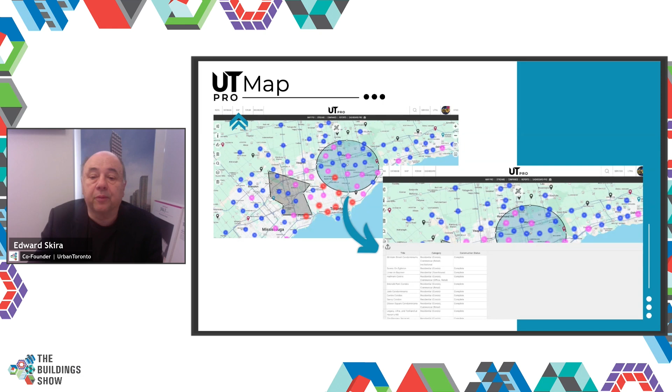So there is a wealth of information, and UT Pro offers sophisticated tools that will allow you to download information via spreadsheet and do other types of analysis to help you get the information you like. This is what UT Pro looks like when you log in. It looks like the regular site, except there's a UT Pro logo, and there's a bunch of different sections. The map has a spreadsheet, so you can pull specific areas. You can draw a polygon or circle on the map and export it easily into Excel or Google Sheets.

Streams is an important element of what we do. We have three lists: new projects - every new project, as we add them, our clients see them in real time; project updates - every update we make to a specific project, whether the height changed or a new principal was added, you'll be able to track that in UT Pro; and finally applications, a stream from the City of Toronto tracking every single application, whether it's planning, COA, SPA, OPA, rezoning, and so forth.

And you can filter by planning, COA, or TLAB. There is a ton of information here.

We have over 5,000 companies in our database. You get full access to them in UT Pro. You can select and filter by category, or put in a specific company name and just look at their projects. It's a really important way to follow what's happening.

Reports is a very integral part of UT Pro. It allows you to look at 5,000 companies, 5,700 projects, 144 data points, and slice and dice the data however you like into spreadsheet form.

We have dashboards. This one is available on the public side, on both sides. Pro actually has additional dashboards just for members. This is an overview of development across the entire region by number of projects, number of units, cranes, and so forth. So that is what UT Pro offers.

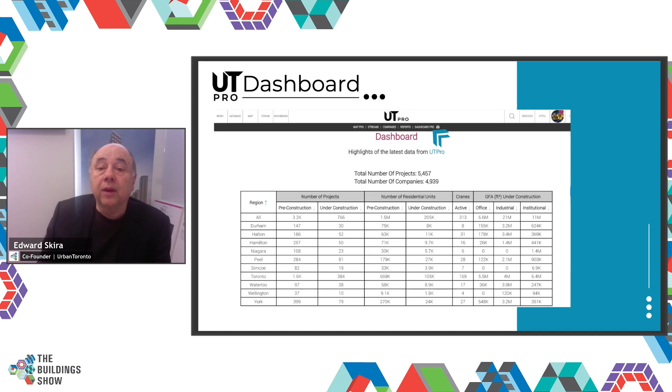We have a major bank that uses it to figure out where to put their branch network, and a major grocery store chain, same idea for their stores. So anybody looking forward in terms of growth - government, retail, school boards, transportation - UT Pro is your product. That is Urban Toronto and UT Pro in a nutshell.

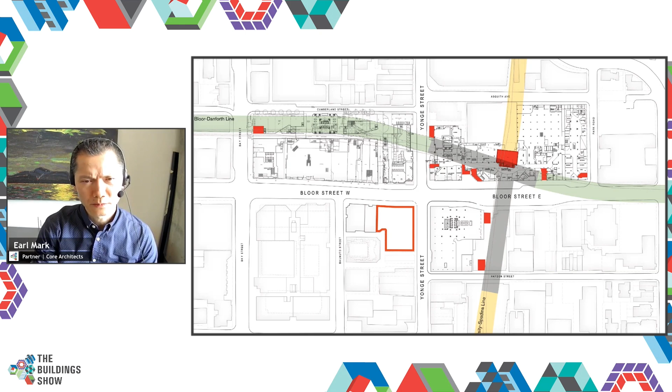This is our site as it existed in 2014, the year that ownership of the site changed hands from the Stollery's family to our client, who asked CORE to undertake a number of feasibility studies to see what could actually be achieved on the site itself.

It immediately became apparent to the client what the significance of the site could be for the city, but also for the city skyline. At this point, the client commissioned a small competition inviting Robert A.M. Stern, Renzo Piano, and Foster and Partners to deliver their vision for the site. This competition was won by Foster and Partners, with Core Architects retained as architect of record.

And this is where our story really starts, and the story starts in London. So here we are in Foster and Partners offices in London. I don't think F&P really needs any introduction to the audience here today. They're a world-renowned architecture firm and really a juggernaut when it comes down to work.

When they started the design for this project, they produced countless numbers of drawings, sketches, diagrams, and models to study what this site could be.

The evolution of design took the course of the next 2 years, informed by a series of workshops, 5 in total, run by Oren Tamir and James Parakh at the city, without whom and their support this project wouldn't have been realized. But also at this time, and just as importantly, RJC, our structural engineer, and RWDI, our wind consultants, were retained to help inform the building.

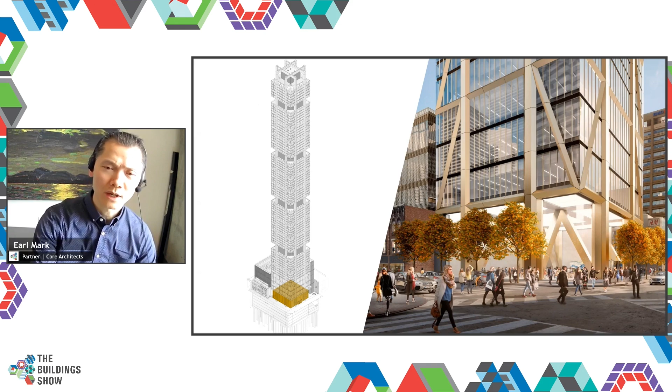It's probably no secret at this point that the building was purpose-built around a singular ground floor retail tenant. This particular electronics giant had a couple of simple asks. They wanted the project to have a retail space that was roughly the same size as the tower shape above, over 40 feet or 13 meters high, and they didn't want any columns falling into their retail space at all.

And so this is effectively where the first challenge of the project set in, where you would expect to see the tower core consisting of its elevators and its stairs coming crashing down through the ground floor and anchoring down to the foundations below.

Here we were required to stop that tower core at level 5, where it couldn't act as a stabilizing mass, and the project team was forced to figure out how to deal with the combined weight of approximately 4,000 Sherman tanks worth of concrete, glass, and steel, and have this hovering over the commercial floors below.

From a vertical transportation perspective, the solution was pretty straightforward. Coming in from the main lobby, a dedicated group of elevators was added on the west core of the building, 3 elevators taking residents up from ground to their sky lobby on level 6, and then patrons to the hotel and the associated commercial floors up to their connecting points at levels 5, 4, and 3, respectively.

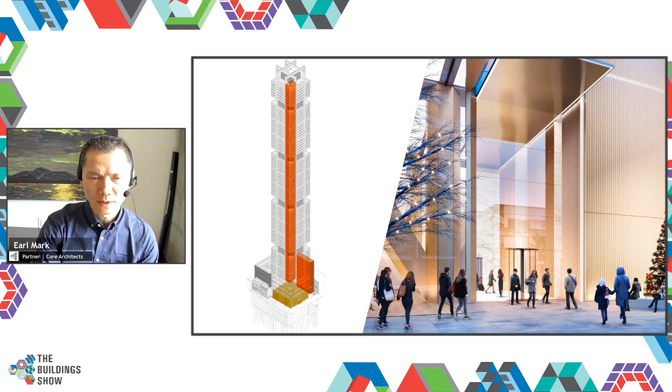From a structural perspective, the solution was also pretty simple. 8 mega columns were introduced, 2 per side of the building to support the tower perimeter. The term mega column, maybe not the most original, but probably one that's entirely accurate.

These are columns that are 2 meters wide by 1.8 meters deep, minus the chamfered corners that you can see in the image on the right. They're composite steel and concrete structures with I-beams or W sections, approximately 550 deep by 450 wide and 115 millimeter flanges. Or for those more comfortable in imperial, imagine these columns being just under 7 feet wide by 6 feet deep, with 22 by 18-inch steel structures in them, 4.5 inches thick.

So some fairly significant structural members here.

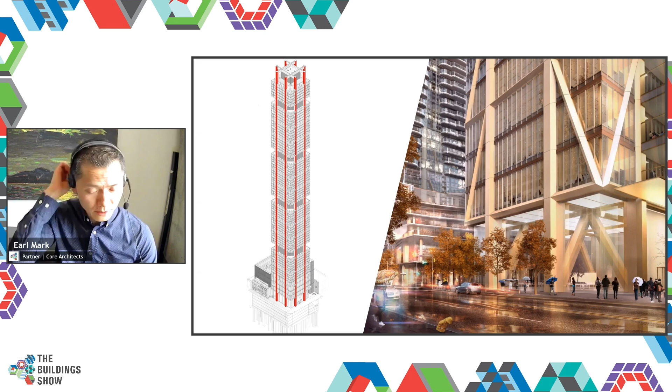Foster and Partners took the idea of a column-free retail space and translated this conceptually to the residential towers, where aside from the mega columns, the only other structure visually experienced by residents would be 4 columns, 1 in each corner of the tower, spanning 5 out of every group of 6 floors, supported by diagonal steel struts, resulting in this belt and suspenders type structure shown in the diagram to the left.

In our opinion, this results in an elegant tower that's roughly 305.8 meters tall, 85 stories in height, with 5 levels of below grade program, and over 1 million gross square feet of construction area.

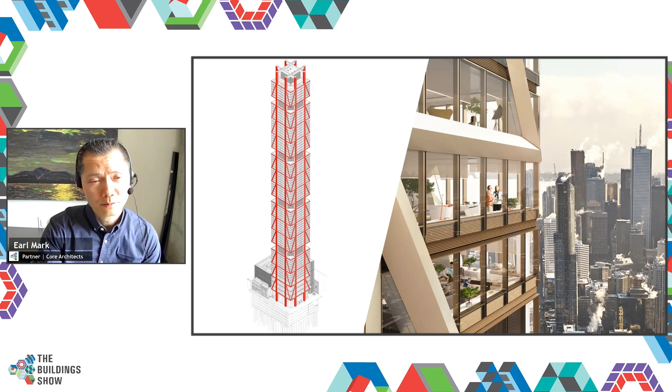If you think about what's happening here physically, it's next to impossible to pump water and other services 300 meters into the air and back down again. So these mid-level mechanical plants were required to serve the various parts of the program they're associated with.

This also helped organize our tower into its various components, with the commercial floors from ground to level 16, banks of 18 stories each of low-rise, mid-rise, high-rise units, and then finally the penthouse and the tower crown at the top. The mid-level mechanical plants also allowed for partial occupancy of the tower, meaning we could occupy the lower floors, being the commercial and low-rise units, while the rest of the building was being constructed above.

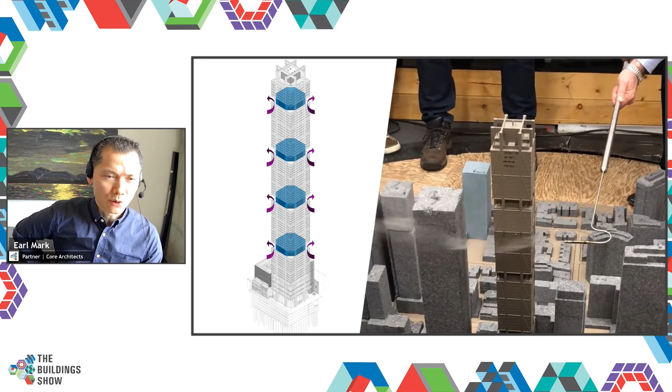Maybe more importantly, what these mid-level mechanical breaks helped do was effectively confuse the wind. With input from RWDI, the corners of the mid-level mechanical floors were severely chamfered and cut back. This allows the building to do something: while the wind speeds wrap around the building, the wind actually gets confused and starts to swirl around the corners, effectively slowing down the velocity of the wind and the forces acting on the building.

If we didn't do this to optimize the building shape, we would have ended up having a tower structure that was larger than what we had described previously.

In the video to the right, we're here in RWDI's wind tunnel in Guelph. The smoke pen, as you can see it moving up and down the tower, represents the motion of air and the velocity of air as it moves around the building. It's really subtle, but when you see that pen pass the mid-level mechanical break, you can see the smoke really dissipates, simulating the change in velocity of the air as it acts on the building.

Finally, at the top of the tower, we added a TMD, or tuned mass damper, shown in the blue box at the tower crown. The idea here is that if you think about the building as really this big sail, with wind blowing against it and higher wind speeds at the top, acting as a big cantilever arm, the wind will actually make the building move up to 455 millimeters in each direction, or almost up to a meter in total as the building moves back and forth.

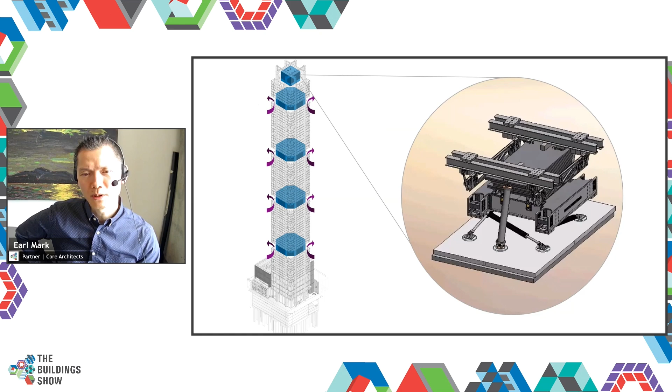In our particular case, we have 350 metric tons of steel at the top of the building that's guided by a number of pistons, which will allow this mass to move in the opposite direction that the building is moving in, slowing down the acceleration and mitigating the negative effects of the building acceleration as it would otherwise be moving.

So we talked about stack effect and the negative effects that stack effect could possibly have in the building. Stack effect could be basically thought of as the movement or displacement of large volumes of air due to the temperature differential inside and outside of the building, and having this air move through the building.

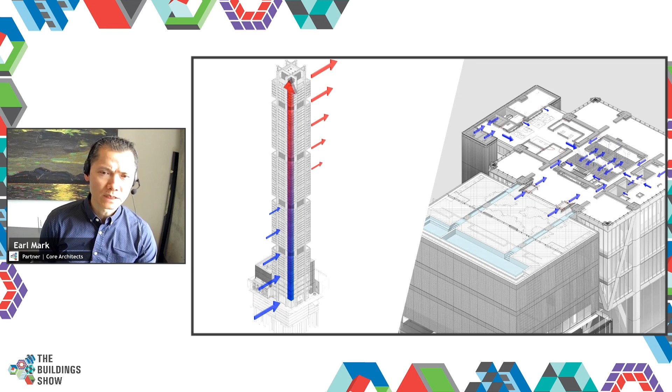I try to think of it not as this idea that warm air rises, but more of this concept that, particularly in the winter months, cold air is heavier and more dense than warm air. This air tends to push itself down in the atmosphere and wants to enter the building through its openings, whether through doors, air intake shafts, or garage openings. It pushes itself into the building and then displaces warm air, which then moves up the vertical shafts of the building, being the elevators, the stairs, and the garbage chutes.

And so this stack effect needs to be mitigated. I'm sure a lot of you understand some of these effects because you've experienced them before, where you've had doors that have been really difficult to open or that slam shut after they're closed.

But what the stack effect will also do is cause some of the building systems to fail, where elevator doors might fail to open because of pressures acting against them. Or you might have areas where you're expecting to get tempered air, heating or cooling, into certain areas of the building, and that air gets displaced, resulting in uncomfortable rooms within the building itself.

So what we're trying to do is figure out a way to limit the motion of air in the building. The diagram on the right-hand side is an axonometric taken on level 6 of our building, where you can see the arrows indicating the direction of air movement through the building, and the size of the arrows representing magnitude.

In this particular case, you can see where we're expecting air to come in through the exterior amenity terrace, through the doors, as well as from the elevators on the west core of the building to the tower, making its way to the elevator core and the stairs, and making it up the building itself.

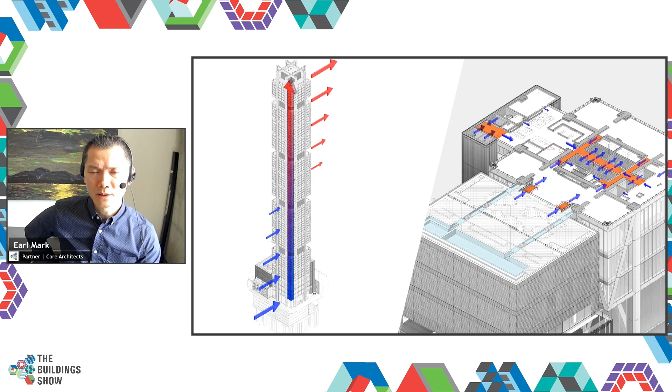To limit this displacement or motion of air, we've introduced vestibules or airlocks in the building, shown in the regions in orange, simply by providing a series of doors with high quality seal packages around the perimeter. What we're attempting to do here is limit the amount of air that could pass through the exterior into the building core, and thus limit the pressures affecting the stairs and elevators and limit the stack effect on the building.

In a similar vein with the elevator cores and stack effect being caused by temperature differential, here we are showing a diagram illustrating air cooling being provided to the elevators themselves, reducing the temperature in the elevators to match closer to the outside air temperatures, reducing the stack effect through these vertical systems.

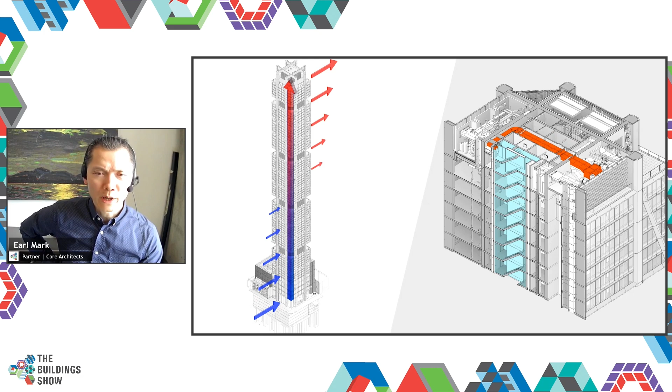And as well, where we have our exit stairs, on a similar notion, we've introduced voluntary stair pressurization in the tower, blowing air into the stairs almost like inflating a balloon, thus preventing air from moving into the stairs and causing the negative effects of stack effect taller in the building.

Okay, so in the interest of time, I'm going to have to talk faster than I already have to zip through a number of slides here.

Ice and snow are a definite cause for concern for some of the taller towers. We had to find ways to prevent snow and ice from accreting on the tower surfaces and falling to pedestrians below, creating risk areas.

Here's our front entrance canopy, where the horizontal surfaces and gutters have been provided with snow melting to allow water to be collected and run back into the building, preventing icicles from forming on the canopy edge and falling down to the main entrances below.

Similarly, where we have larger horizontal surfaces with slopes mandated to slope towards the street, snow shelves have been provided to prevent snow and ice from sliding off and protecting occupants along Yonge Street.

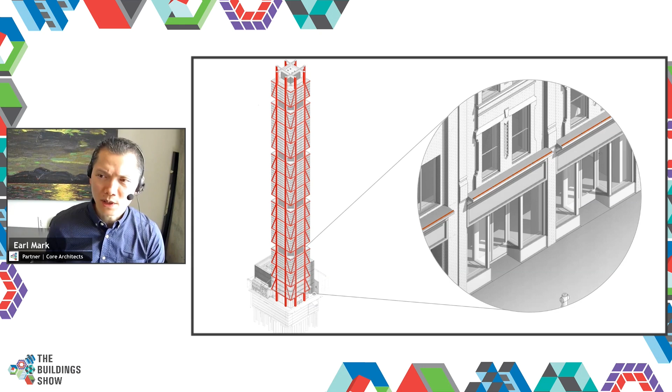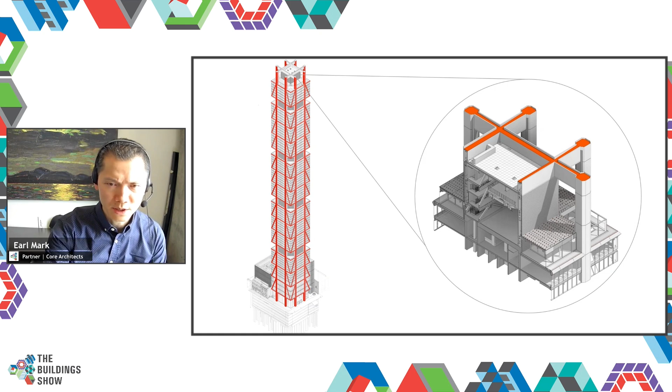At the tower crown, a similar gutter structure is provided to ensure that any snow and ice on the hashtag shape of the roof melts and diverts back into the TMD room without causing risk to anyone below.

Our tower envelope is entirely custom, a system that underwent 5 years of research, development, and testing. These images were taken in Buffalo, where full-scale mock-ups were created so the project team could understand if we were achieving the materiality, geometry, and effect Foster & Partners was looking for.

Lighting studies were also done at night to see whether the patterning on the surfaces matched what F&P was expecting, with the lighting ultimately decided to be at the mid-level mechanical floors or the tower crown.

With the curtain wall system manufactured in Asia, we traveled to Shanghai to witness a performance mock-up, where a 4-story full-size mock-up of the building was created with a pressurized chamber you could walk inside.

There was an array of water jets and a jet propeller blowing air and wind against the building to simulate the atmospheric conditions the project would be subjected to. It was an interesting experience being inside the chamber while the project team scurried around looking for any leaks in the system.

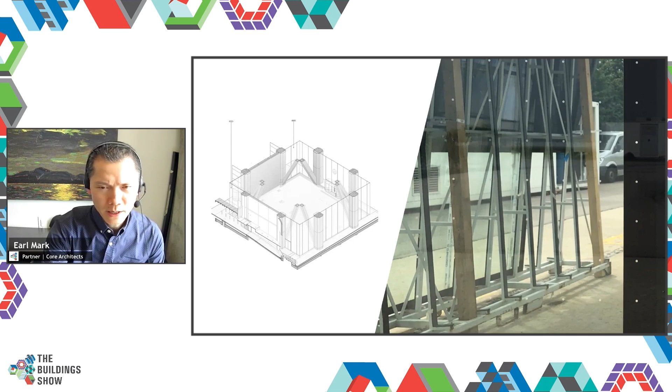The retail envelope was also a bespoke system, with 2 years of research and development for the retail glass. Again, visual mock-ups were done with all project team members, looking at the envelope without finishes and with finishes. Keep in mind this mock-up is probably about a third of the height that exists in real life, but these are some fairly definite large panes of glass.

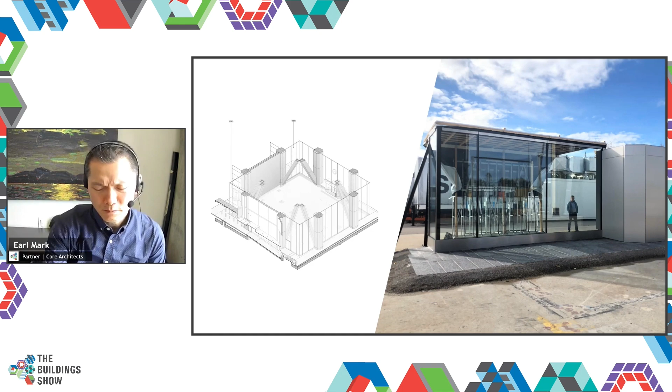They're roughly 2.4 meters wide by 11.5 meters high in terms of their visual section, over 14,000 pounds, requiring fairly specialized tools to get the glass into place. Ultimately it results in a ground floor retail space that's truly spectacular and worth the effort of the 962 pages of shop drawings we had to review for this system alone.

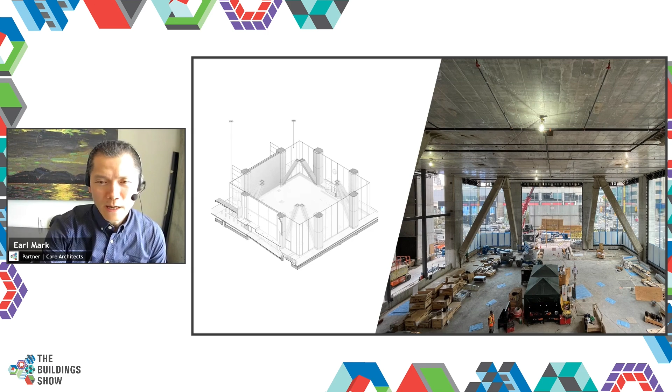Lastly, touching on the heritage component: we had a property at 774, 776 Yonge that needed to be preserved up to a depth of 5.5 meters. So here we are suspending this volume in the air while digging 20 meters below for our parking garage.

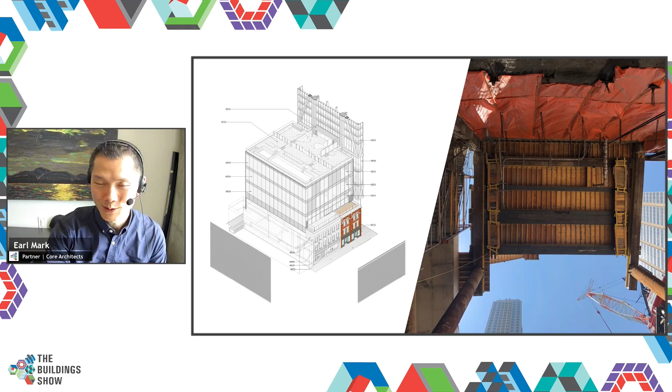So where are we now? I'm happy to say that construction has reached the 84th of 85 floors, so soon to top off.

Cladding is up to level 61, the Heritage and New Yonge Street facades are complete, as well as the ground floor retail glass. We're certainly happy to be working with a dedicated team from Mizrahi, who is really knowledgeable in construction, and with some really skilled and knowledgeable trades, looking forward to seeing this building complete in 2028. Thanks very much, everyone.

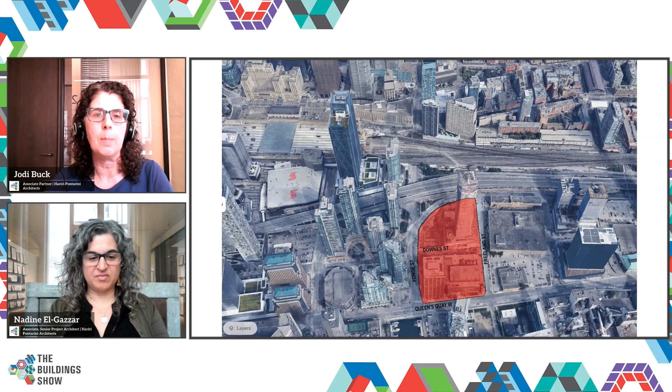The project was initially developed in parallel with the city's Lower Yonge precinct plan. Through a series of workshops and community consultation, the project's progression reflects a responsive approach to urban planning and public engagement. The design has also undergone several rounds of review by both the Toronto Design Review Panel and the Waterfront Design Review Panel.

During the initial schematic design stage, our site plan went through various iterations, but always with a focus on connectivity, pedestrian access, and public spaces. These are some of the earlier versions of site plans in which we explored different networks of mid-block connections.

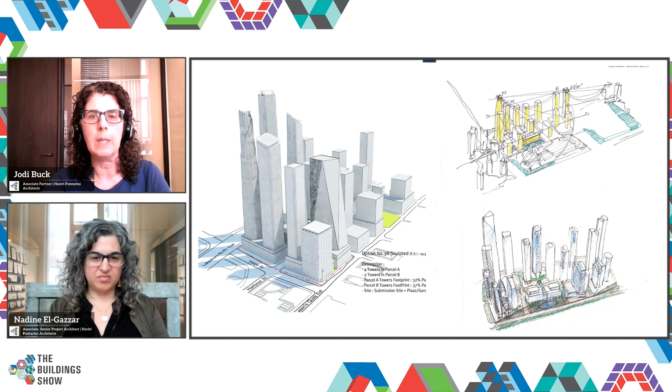Throughout the evolution of the project, we continued to evaluate how the massing impacted both the immediate neighborhood context and the wider city context. We studied tower placement and tower spacing through sketches such as the ones on the screen. We also did skyline studies on where to place the tower height.

Our office did many physical massing studies. We also have a citywide site model located in our office, which we use to further evaluate the massing.

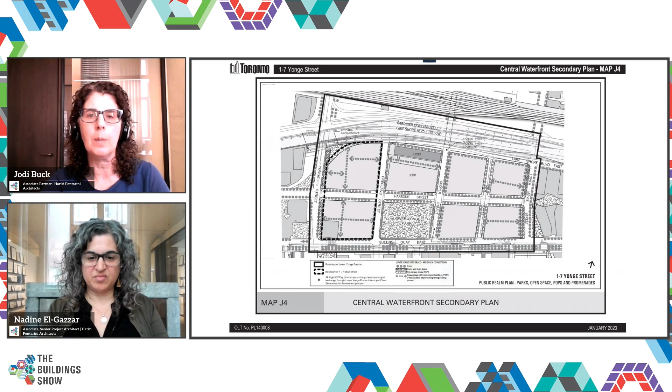In 2018, the 9-hectare Lower Yonge precinct plan was passed and our site established its current design. The precinct, once completed, is anticipated to be a high-density, sustainable community with a range of housing options and community services. Some key features of the Lower Yonge precinct are a central park, located between Freeland and Cooper Street.

The neighborhood will be complemented by widened landscape streets along both Yonge Street and Queens Quay, and the plaza at the southwest corner of the site. Mid-block pedestrian pathways will weave through the site to further enhance the public realm, and a public art strategy has also been developed for the precinct.

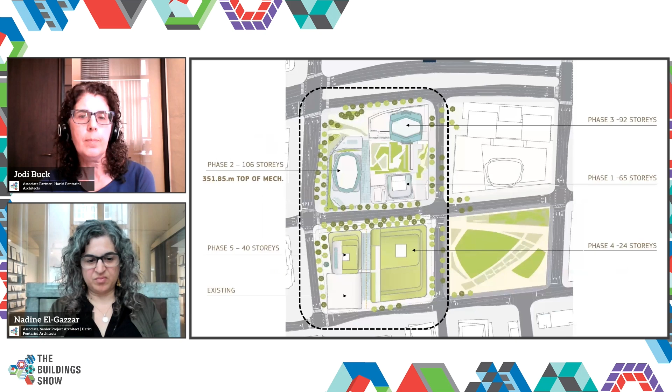The One Yonge site itself has been divided into 2 parcels in 5 phases. The north and south parcels are divided by an extension to Harbor Street, which will be called Downes Street. The north parcel has 3 residential towers, phases 1 to 3, and the south parcel has 2 office buildings, phases 4, 5, and the Toronto Star building.

The program of the site features residential lobbies in pink, which have been located away from the corners to create more private front doors. The hotel lobbies in yellow have been located on Main Street corners. Retail in orange wraps around a podium to animate the street edges.

Affordable housing in purple has been situated on the quieter Freeland Street, and office in blue is located on the south parcel. The community center marks the corner of phase 1.

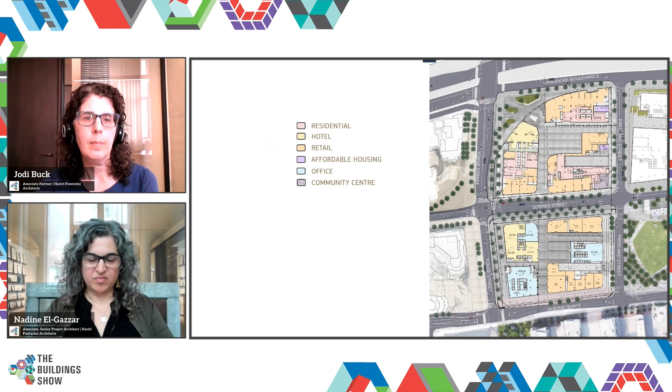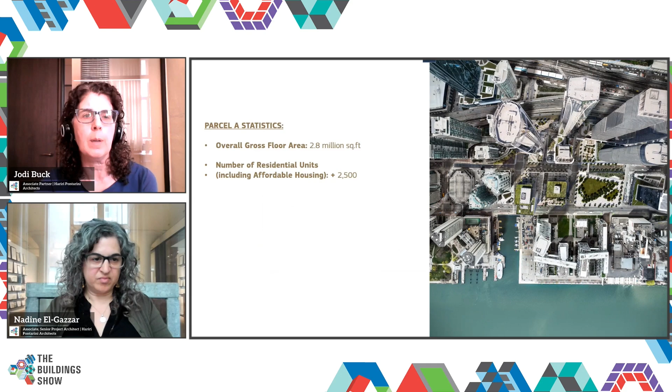Some statistics of the north parcel site: overall we're sitting at over 2.8 million square feet with 2,500 residential units. And in phase 2, we're above 1.18 million square feet of GFA and 958 residential units.

The One Yonge project and precinct were envisioned as a complete community. Although still a long way from completion, we are seeing parts of this vision come to fruition through our phase 1 project. The One Yonge Community Center, which opened last fall, provides public recreation spaces. Additionally, the building offers a mix of housing options, including 100 affordable housing units located in the podium.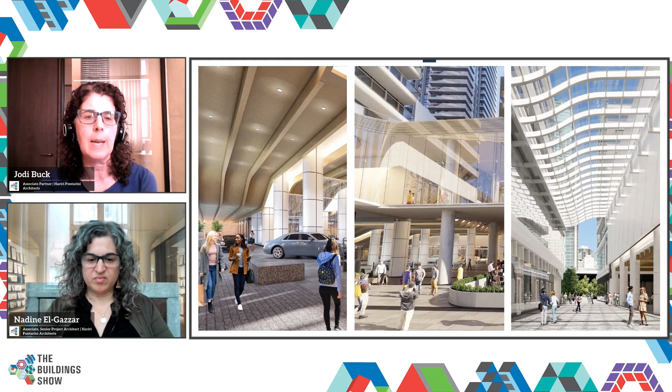As the remaining phases are completed, we will see the emergence of open spaces for public access, widened walkable sidewalks, and dedicated bike lanes. The cascading podium designs of the development will feature a series of residential and hotel terraces, encouraging a visual engagement between the public and private realms.

As Toronto's population continues to grow, so does the demand for housing in prime locations like One Yonge. The trend of super tall buildings has become increasingly common in North American cities, and accordingly, Pinnacle approached HPA in 2021 with a proposal to raise the heights of both phases 2 and 3.

The phase 2 project had already started construction in early 2021, so the additional height had to work within certain design constraints.

Our structural and wind engineers evaluated how the additional height could be supported without requiring a complete design overhaul. Through a series of structural modifications, including lengthened shear walls, we were able to successfully accommodate 106 stories for phase 2 and 92 stories for phase 3.

These changes required us to reimagine some key aspects of our original design, which included removing the tapered bottom of the tower.

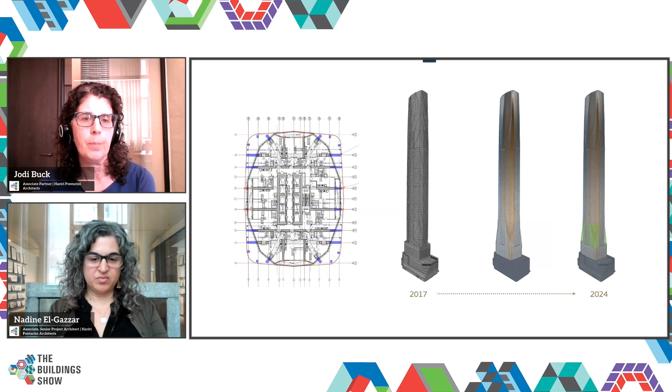By 2021, we were witnessing the success of our phase 1 project as construction was well underway for that tower. With its distinctive twisting and torquing geometry, we decided to carry elements of this design language into phases 2 and 3 to create a cohesive family of buildings.

We chose to use a consistent material palette and architectural language across all 3 buildings, while ensuring each building maintains its own unique identity through distinctive features.

Phase 2 features prominent vertical fins to emphasize its height and verticality, with buttress balconies that seamlessly merge the tower with the podium. And wide, expansive, curved corner glazing fosters a connection between interior program and the surrounding community.

At the ground, a continuous glass canopy will wrap around the podium, creating a more intimate scale while providing weather protection. The entrance to the hotel and residential buildings have been highlighted with a contrasting black stone facade.

The crown of our building will be lit up to mark its place in the skyline at night. And as we have done throughout this project, the additional height prompted us to reassess the building within its immediate context and its relationship to the city skyline.

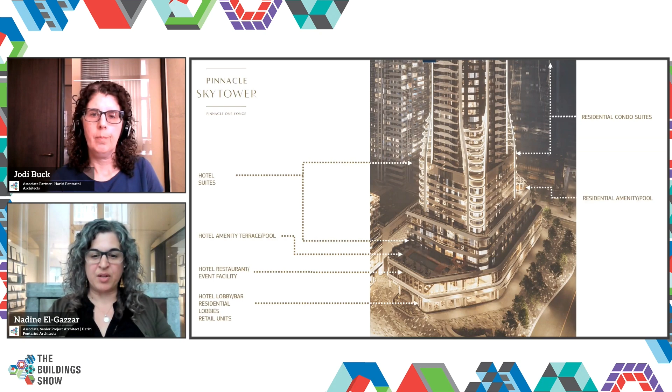Each of the architectural zones was articulated by feature elements on the facade: the podium slab accentuation highlighting the terracing at the base of the building, the podium and balcony frit using similar language as prestige, the feature balconies that buttress the corners of the podium back to the tower, the vertical fins that enhance and elongate the height of the tower, and a tapered facade at the top of the building.

Each of these unique elements came with their own detailing challenges. In order to ensure the detailing was commensurate with the monumentality of the project, we embarked on a design assist with BV Glazing with the support of Pinnacle's team to help us actualize the design elements in their built form.

Podium slab articulation was achieved by applying a metal panel profile into the curtain wall system at the face of slab. The flat panel above the profile creates an interior sill on floor levels and a parapet on terrace levels. The guardrail extends out of the curtain wall, a signature detail that maintains the continuity of the detailing to the parapet.

We studied how the profile could curve at building corners, taper and merge at transition locations, how it could morph its shape, flattening towards the facade, then extruding back out away from the facade. We studied how the flat panel above could increase and decrease in height and where to position the stack joint for the most flexibility.

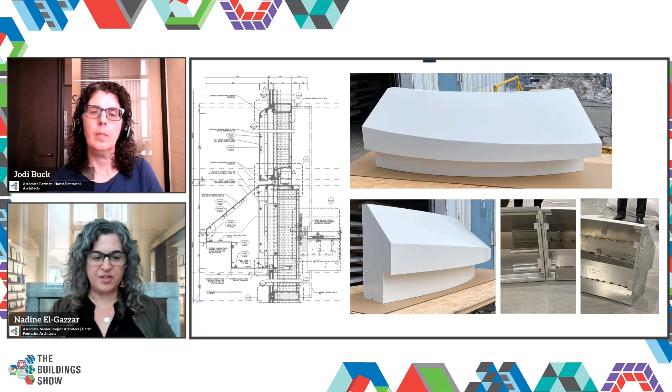We went through a similar process for the 8 vertical metal fins accentuating the corners of the tower. We proposed a size of fin based on scale and prominence. Due to the standard size of aluminum sheets, the sizes we had proposed would result in waste material, decreasing project efficiency. So we developed a solution that added discrete seams on the sides of the panel. This maintained the prominence of the feature while generating less waste material.

We ended up with a roughly 1 meter wide by half meter deep fin with no seams on the visible corners and with guides at the stack joints to ensure perfect alignment between panels. BV Glazing went back to their facilities and generated a full-scale mock-up to test out the profile, construction, reinforcement, seaming before putting these into production, and we've been quite pleased with the results we're seeing on site.

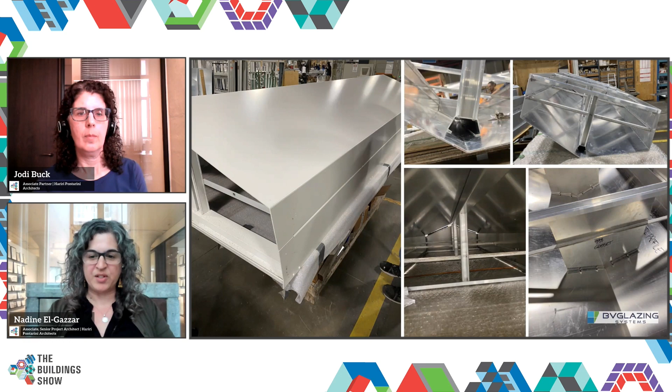The corner feature balconies where the podium transitions to the tower required extensive modeling to establish the exact shape of the fins as they travel from the face of the podium towards the face of the tower. We've integrated a flat panel on the tower facade that follows roughly the same vertical path as the fin receding back towards it. And the two elements come together over a 8-story span.

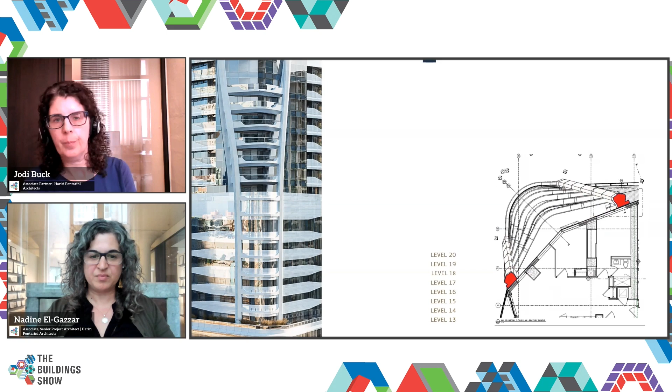We also needed to figure out how to drain these balconies, as the typical approach of sloping off the edge would be a challenge with the metal panel above and below the slabs. We considered separating the panels to allow water to drip down between the seams, but the team was concerned about the longevity of the aluminum with this approach.

So instead, we decided to backslope and scupper down from one level to the next onto the unoccupied area of the balcony below, all the way down to the terrace on level 13.

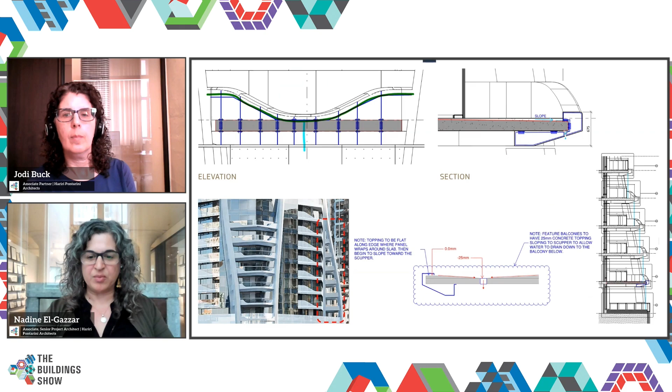We worked with BV Glazing to fine-tune the assembly and structure of these slab covers, and our teams generated the detailing shown here, complete with drip edges and weep holes to allow water that does get on and into panels to find its path out and down to drains.

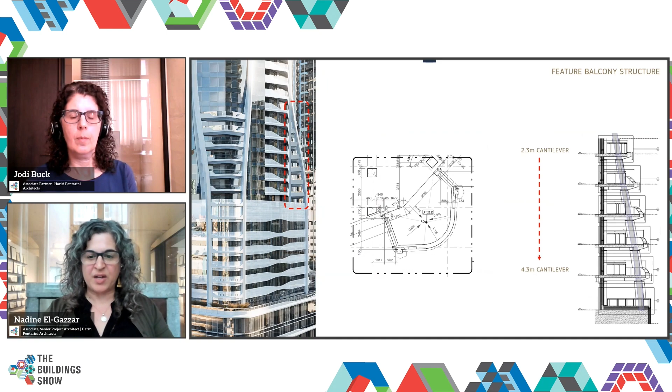When it came to the structure of the balconies, the increasing depth of the cantilevers required additional structural support, so the obvious place to hide that structure was inside the buttresses. We studied the best size and shape for the column as it traveled back to the building and segmented the concrete to simplify the forming.

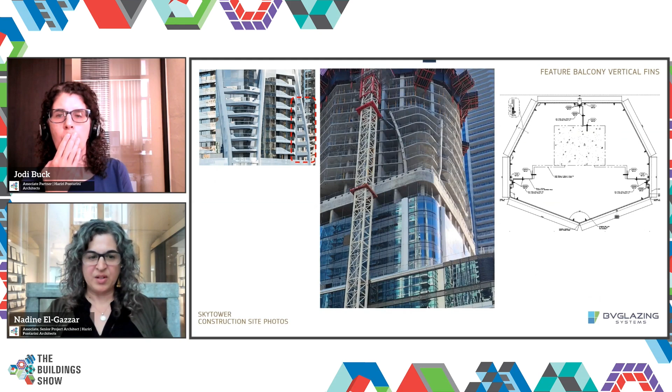Here are some progress images from the site, with the structural columns without cladding and with some cladding installed around the columns. The fin cladding hasn't been installed yet, but we're looking forward to seeing that come together.

In terms of the tower design, we worked collaboratively to iron out some of the more challenging details and transitions, including these corners where the initial proposal was to transition between curtain wall and window wall at the corner.

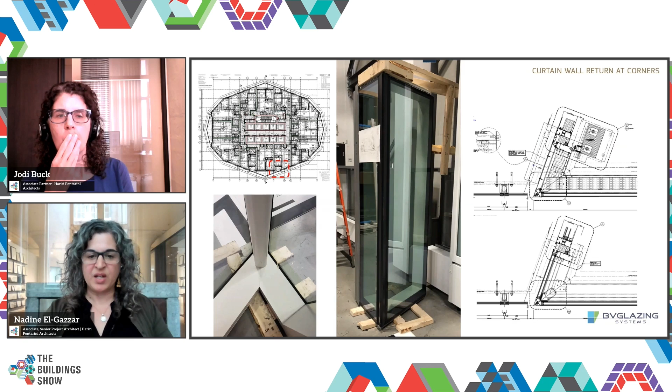However, with the challenges of differential movement and slab edge placement, the team proposed that the entire corner be manufactured as one unitized curtain wall panel, which in this revised detail pushes the slab edge and anchoring back away from the corner, allowing vertical continuity and seamlessness of the corners, as can be seen in the full-scale mock-up completed at BV Glazing's facilities.

The same approach was taken on the north and south corners.

In addition to the distinguishing design features of Sky Tower, there were special considerations that Pinnacle and the design teams collaborated on, particular to the design of a supertall. The Council on Tall Buildings and Urban Habitat, CTBUH, designates a supertall as being taller than 300 meters. Sky Tower as a 95-story tower was 294 meters tall to the top of the highest occupied floor.

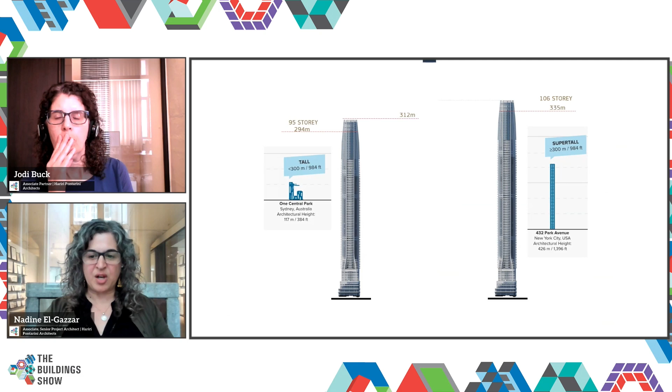And when we added 10 floors, it became 335 meters tall to the highest occupied floor, crossing the threshold into becoming a supertall. And just for interest, these are the heights to the top of the parapet for 95 and 106 stories, both of which are over 300 meters.

In speaking with Jablonsky, Ast and Partners, our structural engineer, we were told that the biggest challenge for supertalls is building slenderness, which is the height to width ratio.

In order to address slenderness, the following strategies are applied in order of effectiveness: widening of base structure, lengthening of walls resisting the direction of slenderness, adding walls, and lastly, thickening walls.

As our structure tapers down from the tower, given site constraints in building design, we were widening within limits and down to the levels of the podium, lengthened walls within these limits, and thickened walls where helpful.

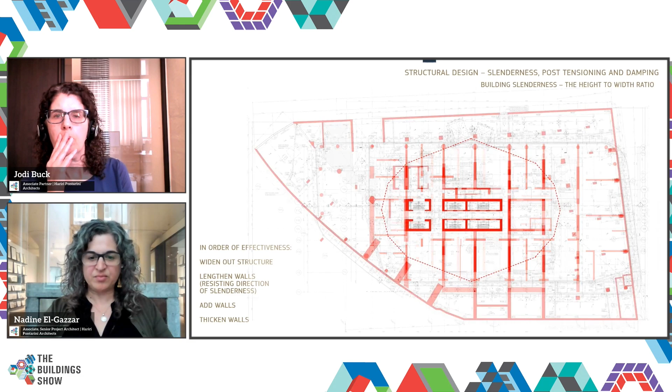In order to deal with the lateral tension and compression loads in the wall, we needed to add post-tensioning to shear walls in the lower half of the building.

Sleeving through post-tension shear walls would need to be minimal or avoided at all, as can be seen from the density of reinforcement. In the residential tower, this was not a problem, as shear walls are undisturbed between suites, using the corridors for mechanical transfers.

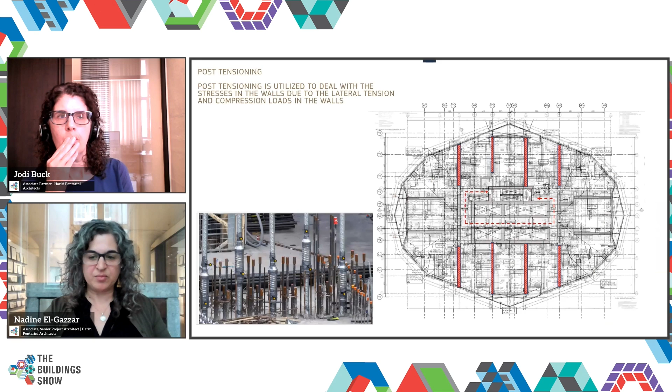However, when it came to the hotel suites, which were mechanically served by duct runs circling through the suites, sleeving through shear walls became a challenge. On the applicable levels, we were required to reroute mechanical ducts into the corridors to alleviate sleeving through, or increase spacing between post-tensioning rods to allow for sleeving through the walls.

While buildings of this height are designed to accommodate sway at the top, occupant comfort can suffer if not addressed. In collaboration with the team at Pinnacle, our structural engineer, wind engineer, and Motioneering, who are world leaders in motion control solutions for tall buildings, we drew on past experience researching precedent tall buildings in New York City. Our engineers established the anticipated pressures and accelerations at the top of the building and used that data to tweak the structure. A design for supplemental damping was then provided by the team of engineers at Motioneering to reduce the acceleration to acceptable levels for occupant comfort.

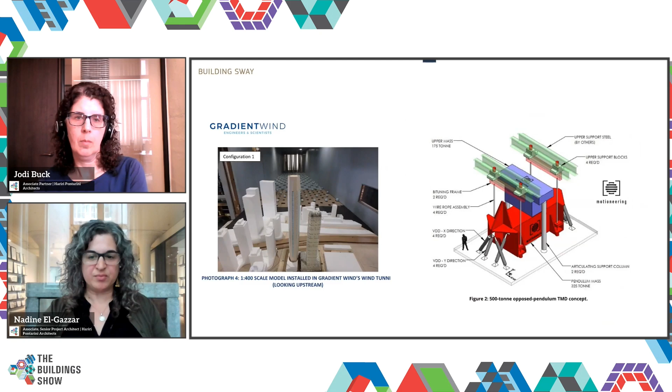Based on previous project experience, Pinnacle asked the design team to consider the impacts of stack effect on stair design. We highlighted a conflict between the code requirement to passively pressurize the stair using stack effect and the anticipated pressures on doors at the top of the building. We turned to our wind engineers to model the wind pressures on crucial doors throughout the project. It was noted that stack effect pressures on stair doors from within the stair at the top of the building would exceed the allowable force to be applied to those doors for exiting as per the code.

Effectively, you would need to apply above average strength to be able to exit into the stair, especially during a fire event. In order to address this on a day-to-day basis, we broke the stair stack into 4 sections by introducing vestibules in the stairs every 30 levels. However, during a fire event, the code requires all doors within the stair to open, so we're back where we started with excessive pressures on doors at the top.

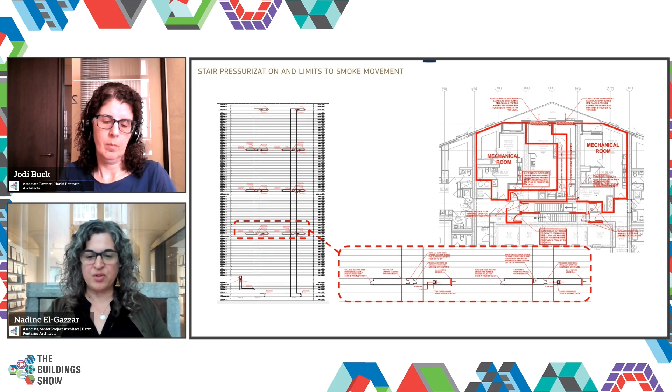In order to address pressures during a fire event, our mechanical design team, MV Shore, introduced pressure relief corridors to the exterior every 30 floors, controlled by pressure sensors in the stair, which would detect when air pressures are high and activate the relief louvers to allow air to dissipate to the exterior, equalizing the pressure within the stair so that doors at the top could still be opened from the floor area into the stair.

Stack effect is not only an issue when it comes to stairs, it creates problems in tall buildings anytime air is allowed to communicate between vertical shafts in the building and to the exterior, especially when air infiltrates at the lower parts of the building in winter, affecting the upper sections of the building with outward pressures. Pinnacle took a strong approach towards mitigating stack effect, initiating and supporting comprehensive strategies to address this.

We introduced interruptions in airflow between vertical shafts within the floor plates, as well as access to the outdoors. For example, on P2, we ensured that all elevator lobbies were partitioned into their own compartments with doors between them to prevent air from transferring back and forth between elevators. Of particular note, due to the height of the building and complexity of program, Sky Tower required 16 elevators. This creates a large number of vertical stacks that need to be considered for stack effect.

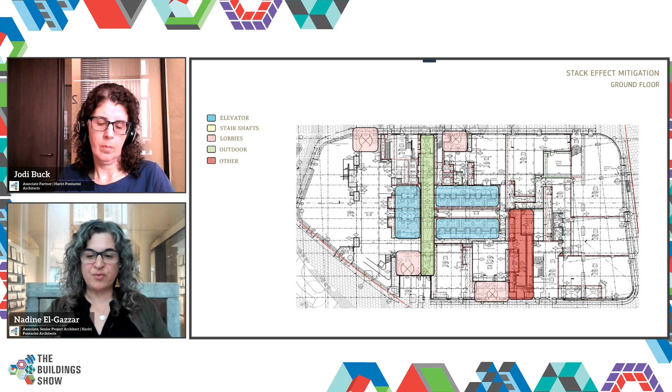On the ground floor, we made sure to separate each group of elevators into their own compartments and added several doors between those compartments and between elevator lobbies and exterior doors, similarly for hotel elevators and the exterior. We also made use of 4-leaf revolving doors and vestibules for swing doors to limit airflow to elevator lobbies.

On amenity floors, we turned low-rise and high-rise elevator doors away from one another into separate compartments, separated by 2 sets of doors in each direction to limit airflow between elevators and to the exterior outdoor amenity. On residential tower floors, we added doors between the elevator lobby and the rest of the corridor to prevent air from communicating between elevator shafts, stair shafts, and the exterior wall.

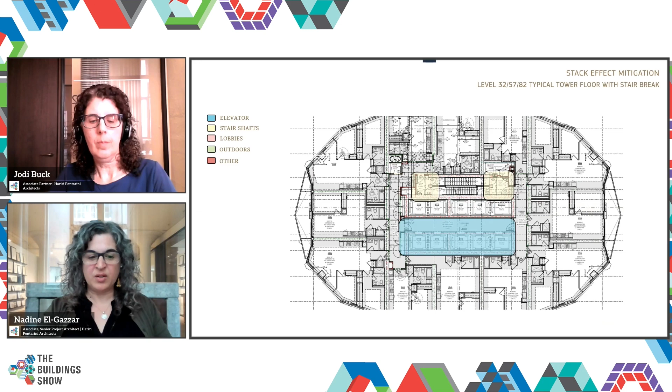The last level served for low-rise and the first level served for high-rise are 1 floor apart to avoid the 2 banks of elevators from being in the same air compartment. And at the top of the building in mechanical spaces, we added vestibules.

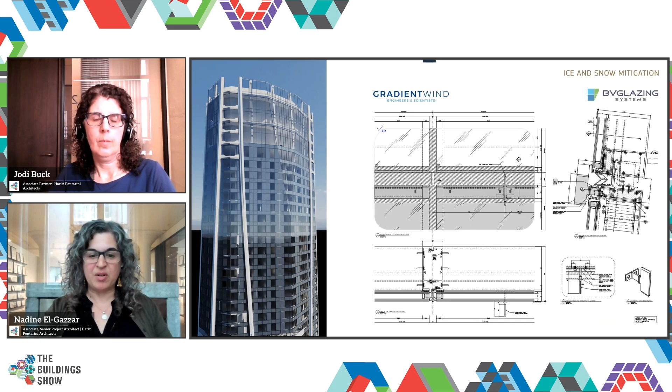Because of the height of the tower and the tapering at the top of the building, we asked Gradient Wind to conduct a falling snow and ice assessment, which yielded that levels of snow accumulation at the top of the building should be addressed. Mullion caps and knife plates were recommended to be spaced along the facade every 500 millimeters on center to break up large accumulations. We continued to work with BV Glazing to develop the design of the knife profiles to a more minimal stainless steel blade, effective in meeting its aim but not impactful to the facade design.

Lastly, we'd like to acknowledge that a project of this magnitude and complexity truly is a collaborative venture, and we wanted to thank the members of our strong and innovative team of experts who are bringing this project to fruition. Thank you.

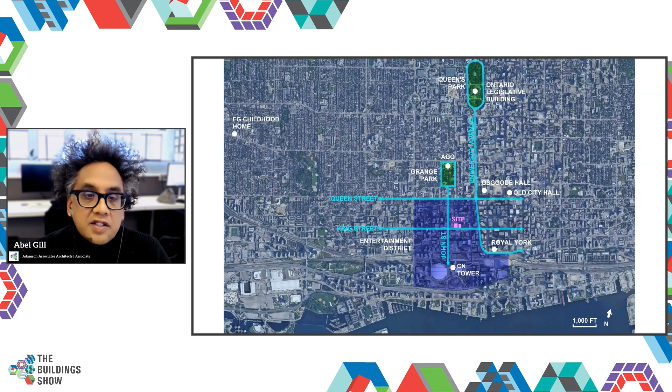Our site is bound by the Princess of Wales Theatre and the Royal Alex, and Roy Thomson across the way. So here we can see the two plans where the towers straddle Ed Mirvish Way, which was Duncan Street. The East Tower is right next to the Royal Alex, and this is the one currently under construction. As Craig pointed out, the West Tower will be adjacent to the Princess of Wales.

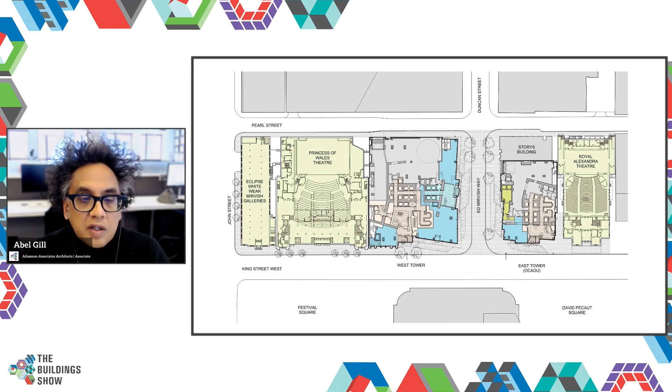So the form of the tower, I'm sure many of you are aware, it's been published quite a bit, like the early concept designs from 2013, when there were about 3 towers. It's now been, it's a 2-tower scheme currently.

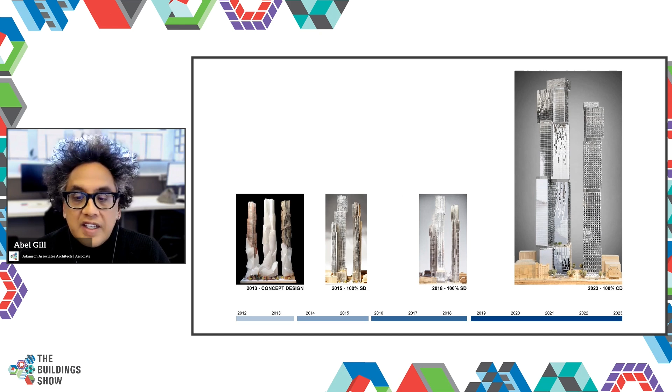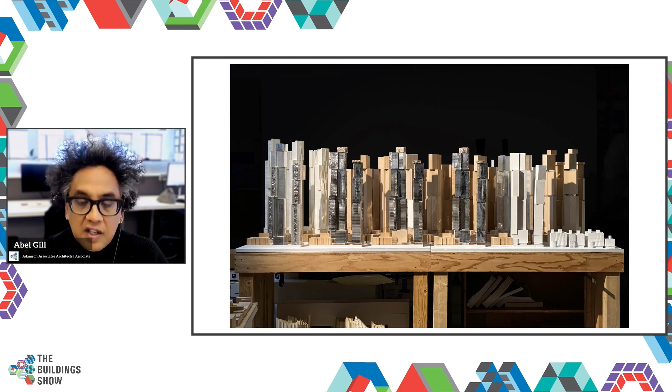And the shorter one to the east. With Frank Gehry's office, they always begin with physical models, and the models vary in scale. It starts with tiny models, and they go version after version to validate design ideas. As you can see, there are many iterations for the form of the towers here.

Now the current scheme was divided into 3 stacks to create some movement within the facade, but still not totally bespoke floor plates everywhere. The facade itself is a stainless steel rain screen with 2 main cladding types: a shaped metal panel with a stainless steel rain screen, and then a more typical curtain wall.

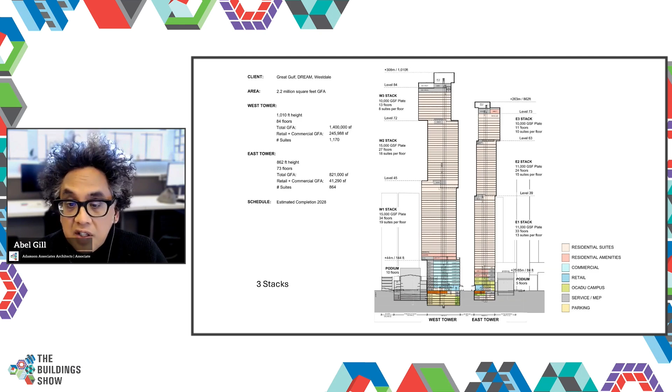This is just an image of the stacking at grade. We've got some retail, and some cultural space within the podium for the East Tower.

And then you can see how the stacks work here, from the podium, and quite similar to the one at the mechanical floors, where we do the shift in the change in geometry, the twist. We have what we've been calling the inset floor, belt floor, and typically on those floors we have mechanical. And then there's a crown feature at the top.

So now, as a super tall, we know the views change from low to high, and Frank's office has done various studies from different levels to help inform how the twist happens within the stacks. At these lower levels, the views are obscured by the various other adjacent buildings, and as we move up, it opens up more towards the water and the city. Once we get up to the 235-meter mark, we've got a pretty wide open view.

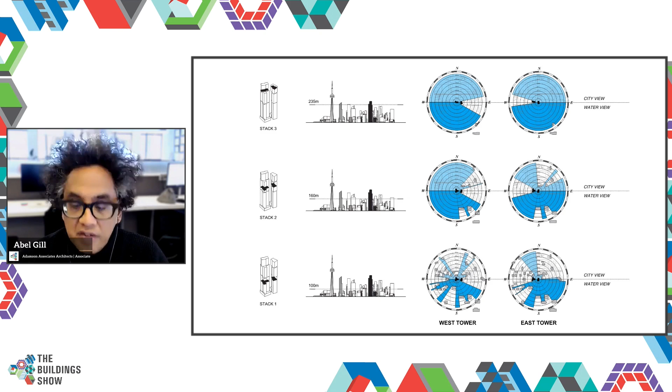Very important to Frank's office is the facade. We had 2 main approaches: the flat wall, and then the shaped metal panels, which is what we call the punch window. But it's essentially a curtain wall system with a rain screen.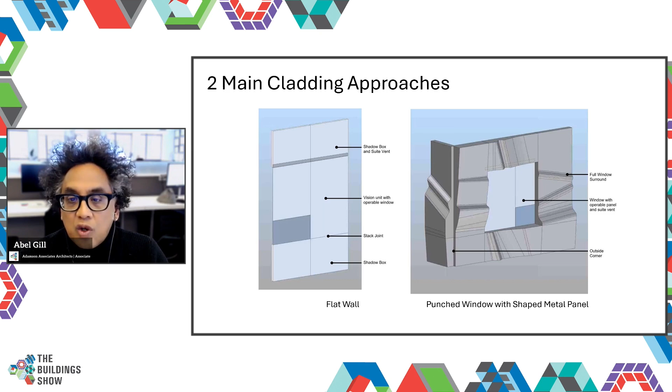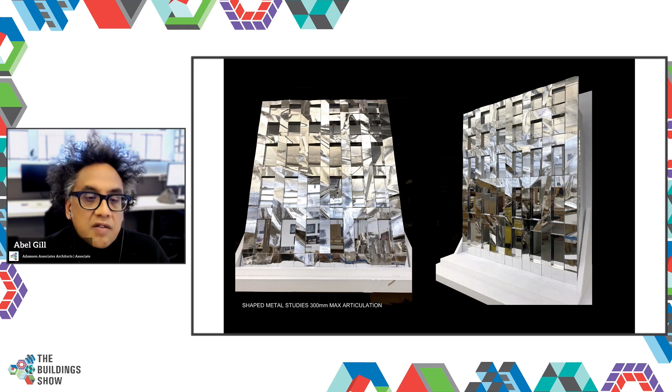So it all starts with the physical model with Gehry's office. They scan the physical model and then translate it into digital project, which is based out of CATIA, to develop the panels.

Creating movement within the shaped metal is quite an intricate study that they've done. To the eye it may seem random or that you're not sure where it's repeating, but they started with an original concept, modeled it, rendered it to see how the sun would reflect, and there wasn't quite enough movement, so they started adjusting the skin itself, introducing a micro texture to the facade.

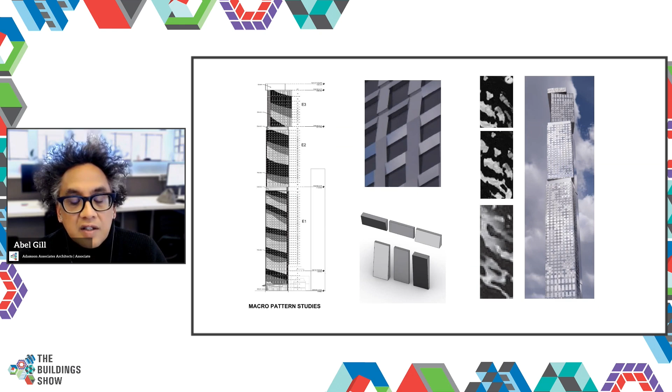Within the punch window panels, this overall geometric strategy is where one panel is sloping outward, one's flat, one's sloping inward. Same for the horizontal panels. And then we take those three basic moves and introduce the kind of micro texture. That was studied with physical models as well as computer models.

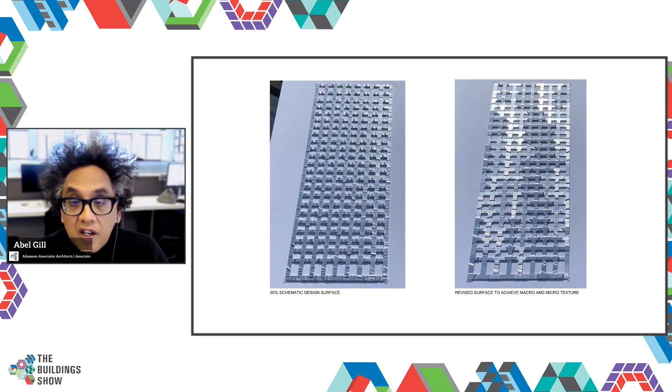You can see here, even though there's a lot of movement within this original scheme, it's still quite flat. And then introducing the micro texture really picks up more light and animates the facade. The panels - it's quite a patchwork, and trying to sort it out is pretty crazy.

But let's just talk about Frank's office. When they're developing their models and studies on the facades, it always comes back to the physical, starting from small scale models to larger scale models. This was something that was built at their office to help validate what they had studied within the 3D studies of the microtexture, just to ensure it was achieving the desired effect.

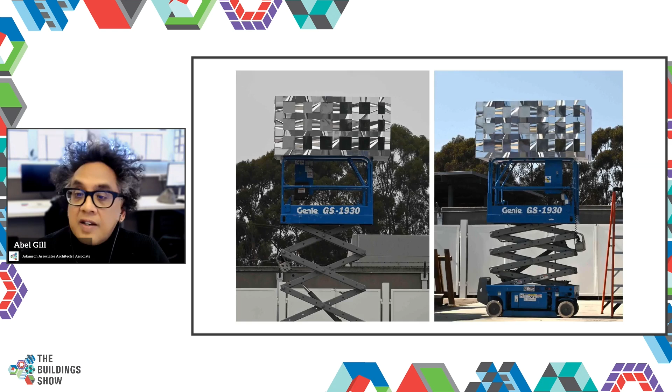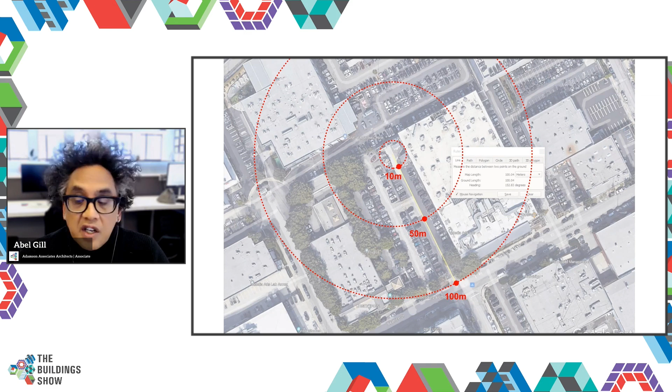So the final materials - the stainless steel panel - it's not just a brushed stainless steel. We've gone with a linen finish because we felt it helped dissipate light in a more pleasing manner.

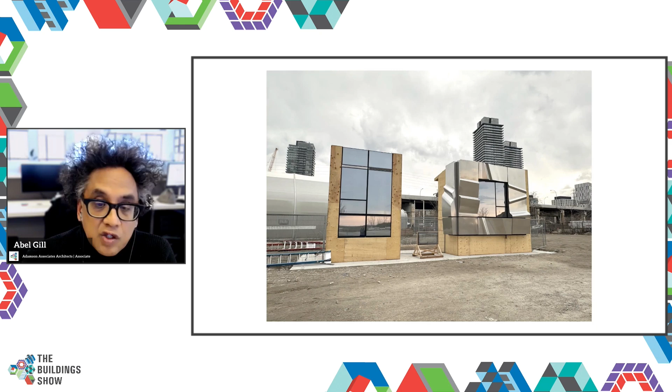This is the initial visual mock-ups that were built. These are actually stainless steel panels. It was important to go see the physical visual mock-up, look at it closely, and back up to view it at different times of day, because of the inherent reflectivity of the material. It really changes quite drastically over the course of a day. Just some other images here, up close and viewing from afar.

Next I'd like to talk about how we were shaping these metal panels. There was a lot of rules to how many moves we would make on the sheet itself. For all the technical advances, at the end of the day every panel is hand bent with a press. We have about 7 moves we can make in the panel, and there's certain rules for the radius and how far to the next move.

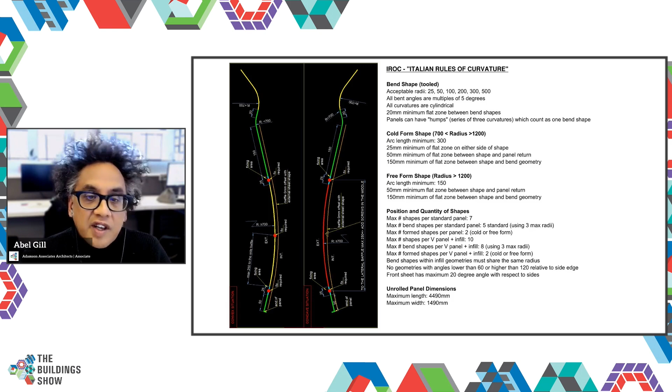Here you can see our fine friends in Italy taking the sheets and beginning to form them. It's quite a little dance that they have to do with the panels as they form them, and it's really quite lovely.

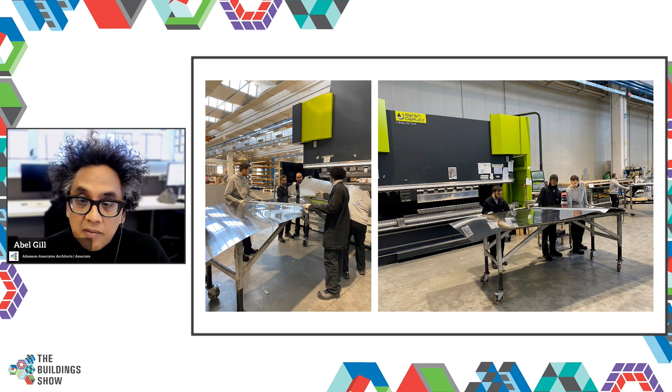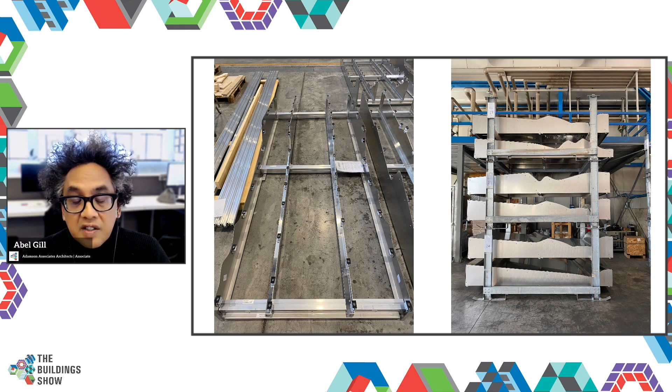Here's an image of the press and custom made dies we had for the various radii we were using. This is an image of our backup structure, and here you can see panels that were made - there's a lot of variation, but there's a method to the madness for sure.

Currently the project is up to level 5 or 6 on site. Panels are being fabricated, but we have gone through all our testing here in Scarborough at the UL Labs.

This is just a few images of our performance mock-up, where we pressurize the chamber. We're going to rack this thing, do vertical interstory movements. Here you can see we're setting up the propeller engines to do our dynamic tests.

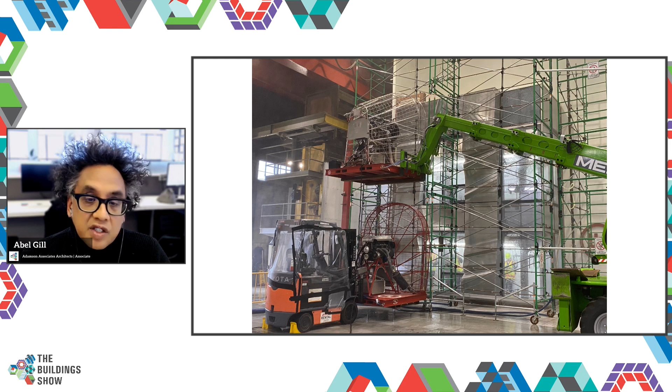We do have operable windows. This is a residential building, and we've got a parallel opening window. And just some views, dimly lit, just to see how this is going to look in the evening.

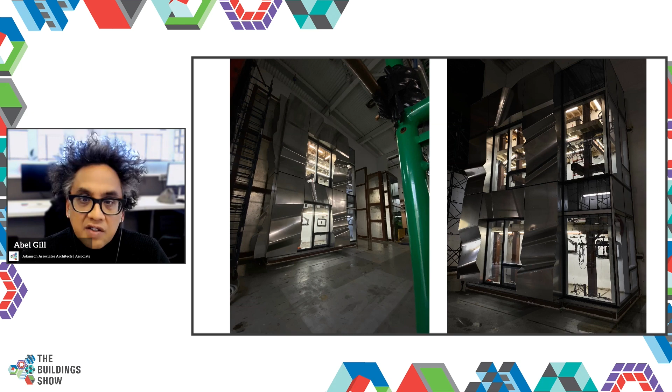I'd just like to finish off with some views, some renderings of the building within the city. And there it is - that's Forma in Toronto. I'm quite excited to be working on it, and quite privileged to be sharing this with everybody here, with my fellow colleagues and our friends at UrbanToronto. Thank you very much.

Thank you, Abel. All 3 presentations, pretty fascinating, so much going on. I am wondering, Earl, you mentioned that it's now 2028 completion for the One Bloor West,

and I suppose that is for keys in everybody's hands, doors open to the various retail and restaurant establishments, before that happens for One Bloor West, and in the same cases for Pinnacle One Yonge Sky Tower and for Forma, buildings top off long before they're actually opened. I'm wondering if the three of you can speak to any breakdown in the timelines that are coming up - Earl, if you can give a little bit more detail.